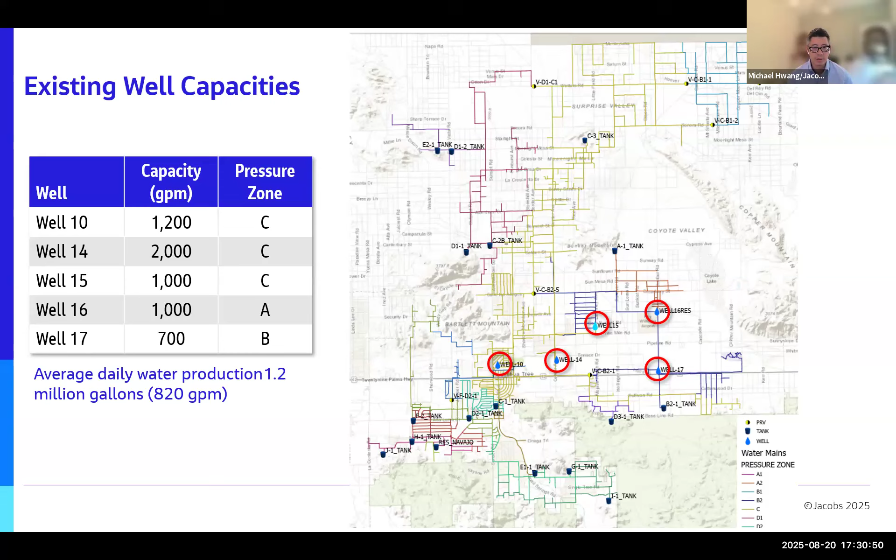One of the things Kathy mentioned earlier was that in formulating the alternatives, we were scoped as part of the study with Joshua Basin and the Water Alliance to look at decentralized or centralized treatment. So I'm just going to go over what that means.

We'll focus on decentralized treatment, which is that second column on the screen. For decentralized treatment, the treatment solution would be implemented at each of the individual well sites, all 5, and sized based on the individual wells the system is installed on. That would require each treatment system to be integrated with the existing well, disinfection, and tie-in facilities. In terms of overall system reliability and redundancy, it's really the same, because the treatment is at the 5 individual wells already in place that the district is able to turn on and off to meet demand.

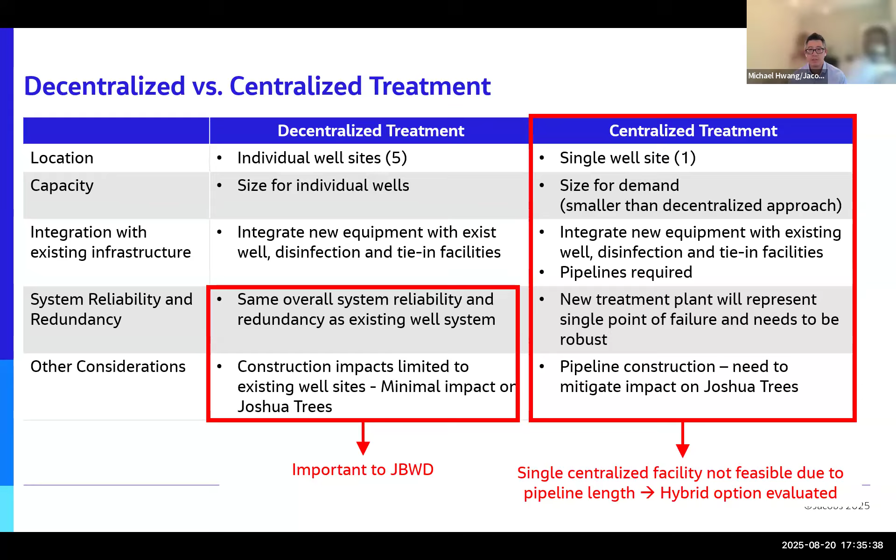When we were doing the initial screening for alternative formulation, the project team determined that a single centralized facility for all 5 wells would be very challenging and not feasible, just because of the length of pipelines that would be required. So what was carried forward was a hybrid option: a centralized facility, but not for all 5 wells, only 3 wells, with the 2 remaining wells having a decentralized treatment system at those locations.

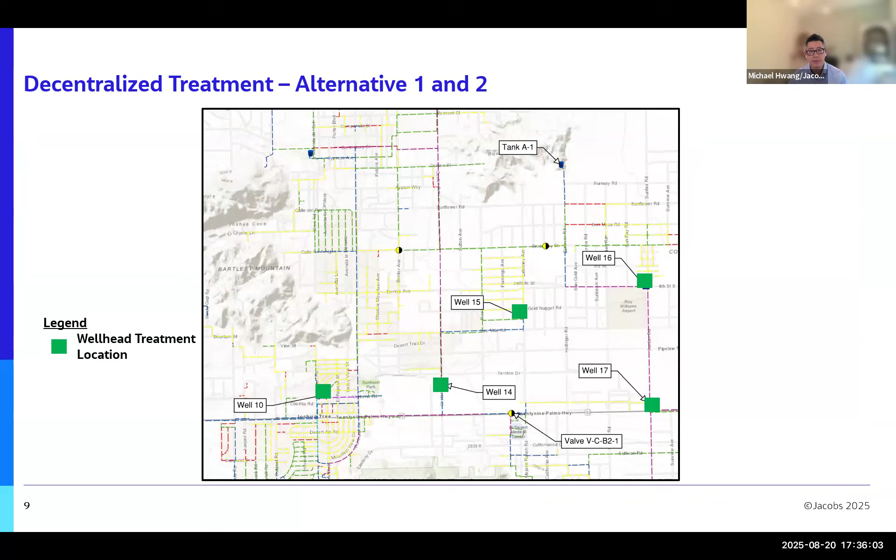So just to put what we just talked about graphically onto a map. The decentralized treatment option is shown here, zoomed in on the 5 wells. Basically at each of the 5 wells in green, you're seeing a new treatment facility.

The hybrid option is shown here, also a map. The light blue shows the centralized treatment location, basically a centralized spot at well 14 that would treat water from well 14, but also water from the 2 closest wells, well 10 and well 15.

The pipelines are shown in that maroon color, this is just preliminary routing that West Coast Civil came up with. The other 2 wells, which are further from well 14 - well 17 and well 16 - would have individual wellhead treatment sites, shown in green.

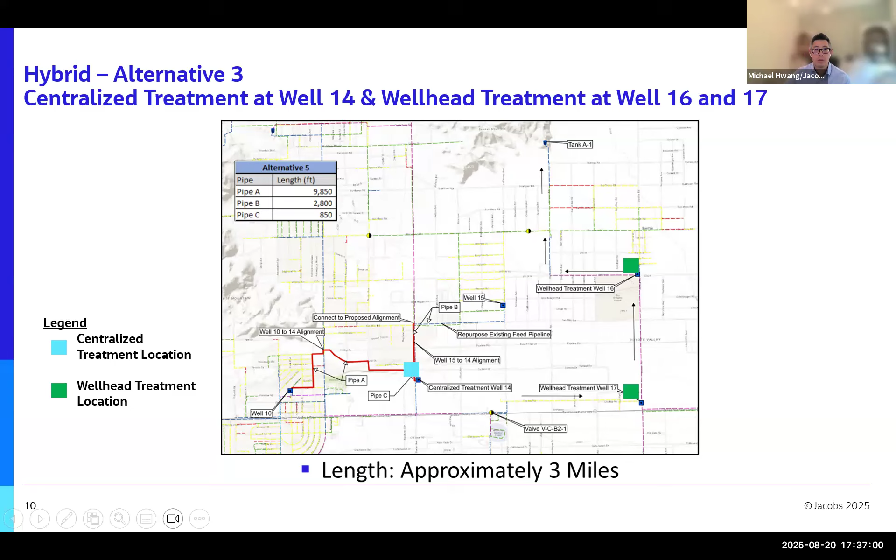So this alternative, we did evaluate it. It ultimately was not recommended, and the reasons are shown here: it was because of the overall reduced system reliability and redundancy.

Even though you still have 3 different sites, the collective consensus with district staff was that it would still be less overall system reliability and redundancy than if you had a treatment system at each of the 5 wells. The other main reason alternative 3 was not recommended was the concern with how pipeline construction was going to impact the Joshua trees.

So in the subsequent slides that I'll be reviewing, we're going to be focusing on the 2 alternatives that were developed around the decentralized treatment.

Any questions before I continue? Hearing none... no, I would, right.

Most of the wells are in areas of the community of Joshua Tree where Joshua trees aren't. I don't know how many Joshua trees would actually be affected by this. Is there an actual survey of all this done?

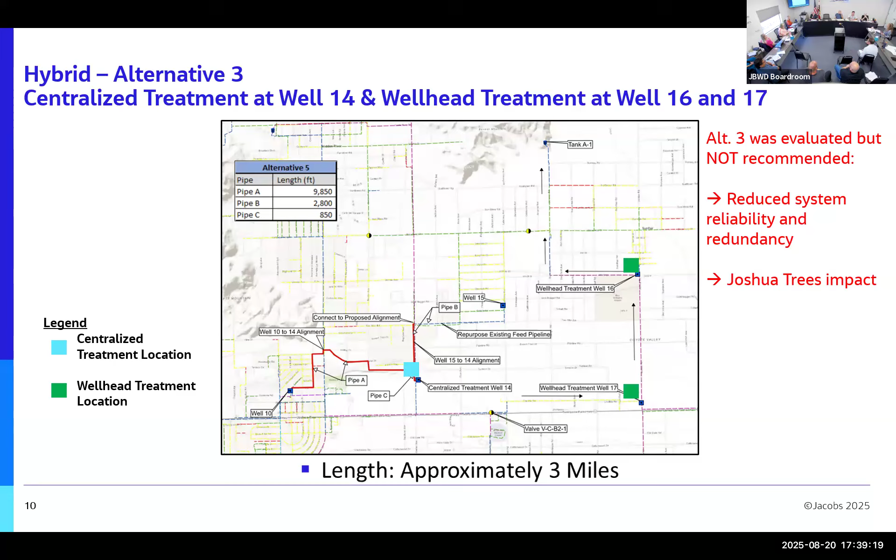Okay, so we talked about decentralized versus centralized treatment. Now I'm going to cover really briefly the treatment technologies.

Previously we listed 3 main technologies, shown here in bold: reverse osmosis, nanofiltration, the second one is reduction, coagulation, filtration (RCF), and the third was ion exchange. For ion exchange, there are several types that could be applied to treat chromium-6. As part of the initial screening...

Several of the technologies were looked at but screened out. The primary reason they were screened out, I'll go through each one, is because of the residuals generated from these treatment approaches that would have to be disposed of.

For reverse osmosis, it's a membrane treatment process. It is effective, but it does produce a brine concentrate waste that has to be managed. Typically that would be discharged to a sewer or to evaporation ponds, both of which are limiting. That technology also requires chemicals for membrane cleaning, which would have to be managed.

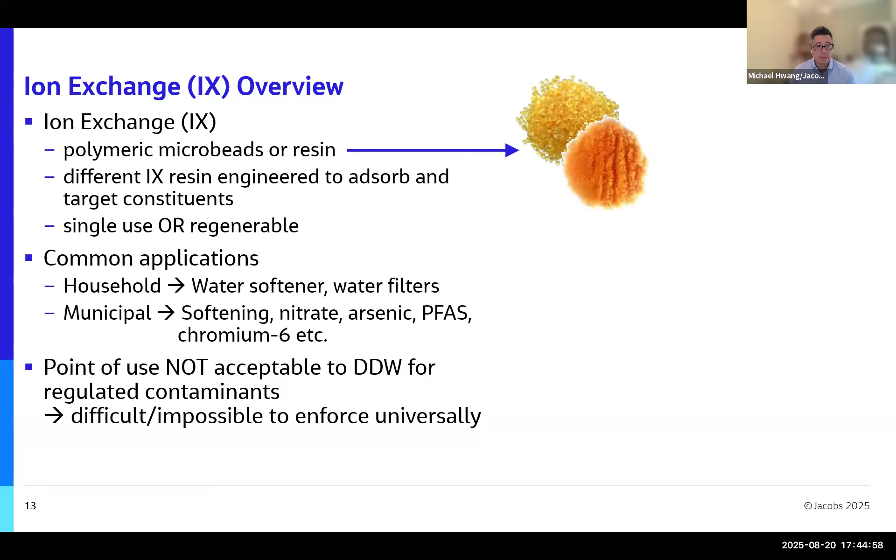So a little bit more detail on ion exchange. What is it? It's basically an engineered media made up of microbeads or resin. There's a picture of it, and it looks kind of like quinoa. There are different types of resin engineered to adsorb different types of constituents, and as I mentioned earlier, they can be single use or they can be regenerable.

Common applications that many of you may be familiar with are on a household basis. If you have a water softener yourself, what they typically put in those vessels next to someone's house is a type of ion exchange media. With a water softener, people usually have to buy some form of salt, either sodium chloride or potassium chloride, which you can pick up at Home Depot. That's what's used to batch up the regeneration solution.

On the municipal scale, the systems look a lot bigger. They can be used to remove different types of constituents. They can soften water, just like home water softeners, except on a larger scale. They can remove nitrate or arsenic, or if you've watched some films on Netflix, they can remove PFAS, what they call forever chemicals - that's shown in the picture on the right. They can also be used to remove chromium-6.

The last thing to note in terms of ion exchange and other treatment technologies is that point of use systems are not acceptable by the Division of Drinking Water. They really do want and require treatment systems to be put in place at a larger scale, because there isn't a way for the state to regulate households on an individual basis and enforce that requirement.

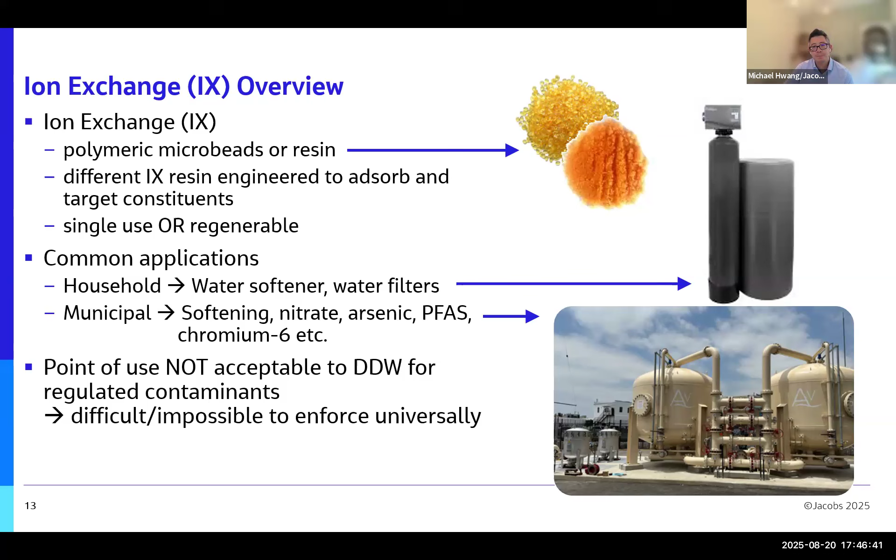So what would the treatment look like at each of the sites? The treatment system between the two alternatives is actually quite similar. The process equipment would include a pre-filter, so a cartridge filter or bag filter, just to take out any large particles from the individual well sites. Then you would have ion exchange pressure vessels arranged in a lead-lag configuration, meaning two vessels in series - one does the work, and the one in the back end is a polish bed, to make sure that when the first one is spent, what gets sent to the public is still clean.

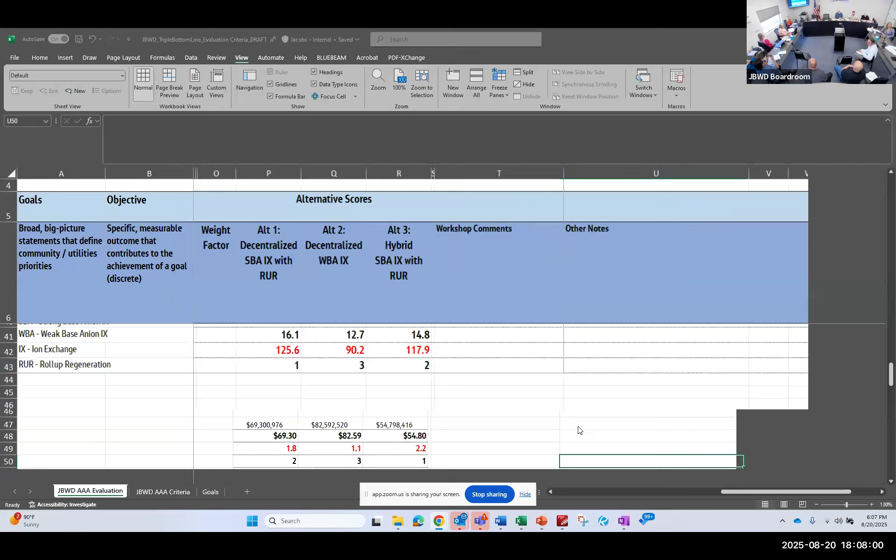And then in terms of cost, you can see the net present value cost listed here. I hope this is not too small. It is. Did you say it is? Yeah, it's a little small. I think the numbers don't quite match what we saw on the other slide. These might be the numbers before they were refined. This is the net present value cost. Keep in mind, it's not the capital cost, so it's all in for construction as well as operation and maintenance over a 20-year period. Yes, so this alternative does have the lowest net present value cost.

$54.8 million. Yes. Next slide.

Any comments or questions? This is for 10 years, isn't it? Didn't you say it's 20? They said 20, well you said 20 on the other graph, but I thought you said it was 10 years on this one. It's all based on 20 years. It is, okay. Yes.

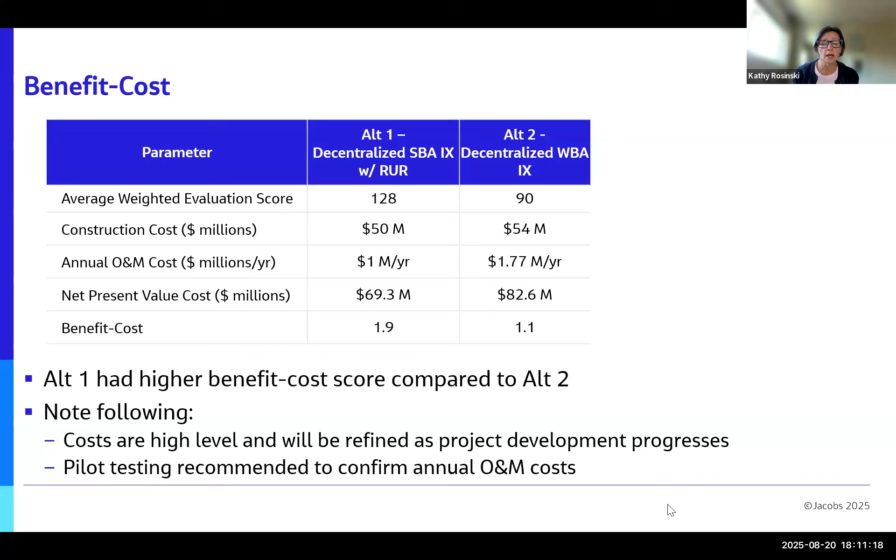We do have some closing remarks just kind of on next steps as you think about what to do about this, how to execute this.

So the next step really would be to just think about how to implement this project, to refine and optimize these alternatives. There is certainly a lot we could look at to start looking at more details and refinement that can give you better confidence in the cost.

Looking at project funding sources, so state revolving fund or WIFIA or other sources like that.

Think about project delivery method. That is important because the time frame for implementation of this project is fairly short, even though these are fairly, I would call, somewhat straightforward projects, just incorporation of those vessels. Still, a couple of years is not a lot of time to implement a project like that. So think about delivery methods that would be able to get this project in the ground for you.

Again, look at permitting, confirm what the permitting requirements and timelines are, and develop a comprehensive implementation schedule so that you can be sure you can meet those regulatory guidelines.

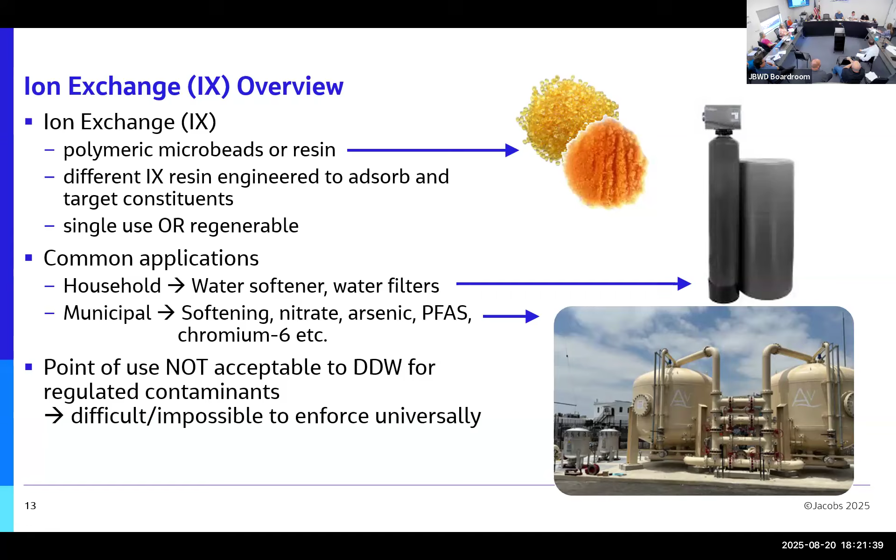I did want to mention, I believe some of the larger districts are already doing this, and there are systems already up in the state handling the mandate, like LA and San Francisco, that kind of thing.

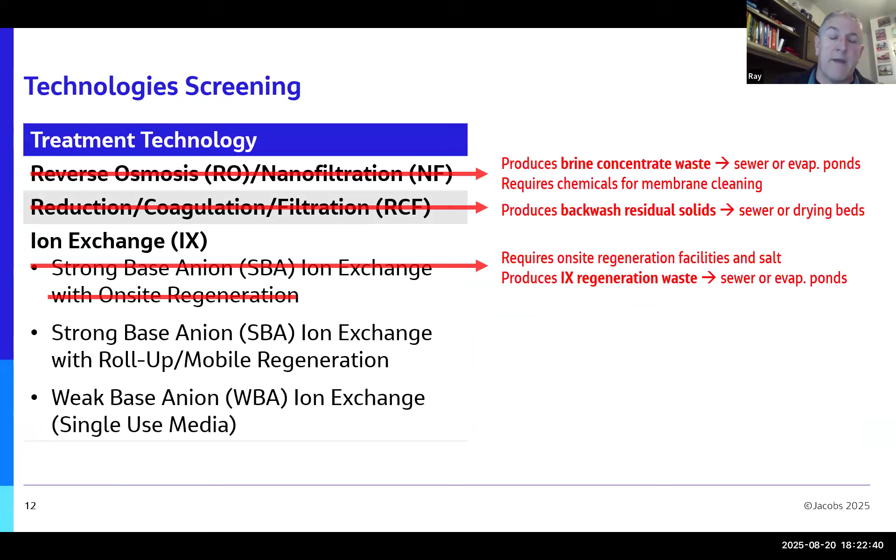So you might consider them pilots because they're functioning already, but does a pilot mean you might find out it's not working right, or is it just accumulating information? It's both, isn't it? It's a small scale version of the full size treatment system, meant to treat the resins and test the process you're looking to choose, and make sure it works with your water quality. There are sometimes differences in water quality that could impact treatment performance, which is why you do pilot studies before constructing full scale. That ensures it should work appropriately with your water quality. I believe the state now requires pilot studying before you choose a treatment option.

All right, thank you, Steve.

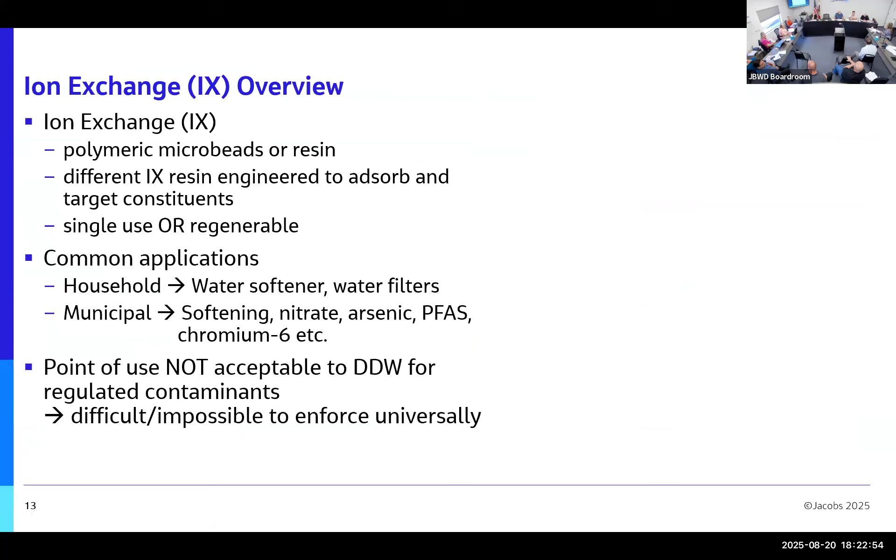There's a book out there, and Sarah has a copy of it now, where smart people say that when you're doing something new, dip your toe in first. Don't overcommit to it. A pilot study would represent a cautionary measure in an area we're unfamiliar with.

Is there the possibility of having to start over as a result? Not likely. Not likely. So you're doing all that now in the research and- not likely, but that's why not likely.

I think pilot study in this case would be valuable to confirm your operational parameters, not to determine whether it works or doesn't. So it's more of a refinement, honing in on which media type is best suited, and confirming how long the media will last and what the long-term O&M costs will be for either alternative, whether roll-up regeneration or hauling off media and bringing in new media. That's probably going to be the goals of these pilots.

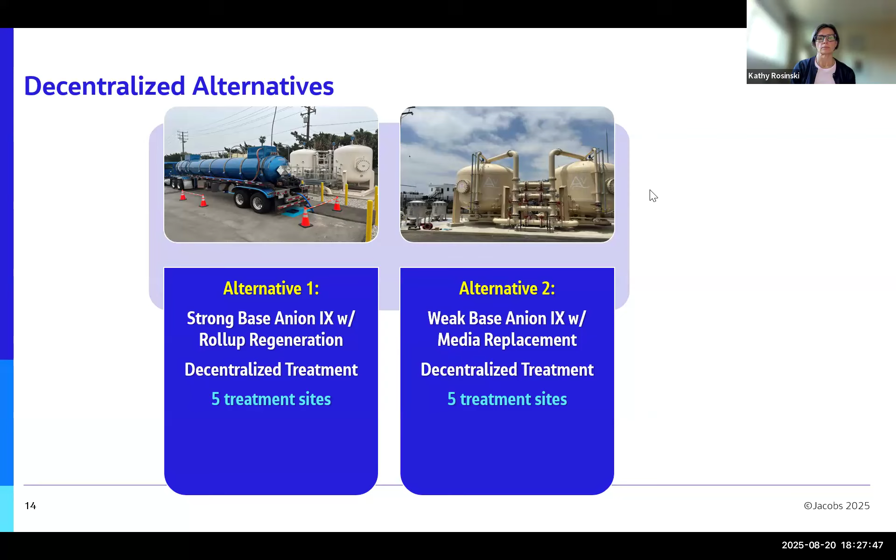There was a range that was listed in the slides, I think at the beginning, 25 to 35, yeah, top right there. For us, that's correct, but for other districts I haven't seen the ranges. Right, yeah, for us I know the range, but for outside districts, I don't.

Does this kind of imply that we need to get more customers? More development? Where are we gonna get the money from? If the operating costs are about $1 million a year, that's about $200 per service increase per month. That's doable, but we do have $750,000 for annual operating costs in the current rate study already, so we've covered some of that cost. Okay, that's good to know.

Well, I was pleased to see that this strong base is not requiring a lot of chemicals. On the bottom of page 13 of this staff report, it says SBA presents fewer safety risks for operators because it minimizes or eliminates the need for direct chemical handling, making it a safer and more straightforward option from an operations standpoint. But things happen, and there could be a leak of some sort of acid because we're fooling around with our pH or something.

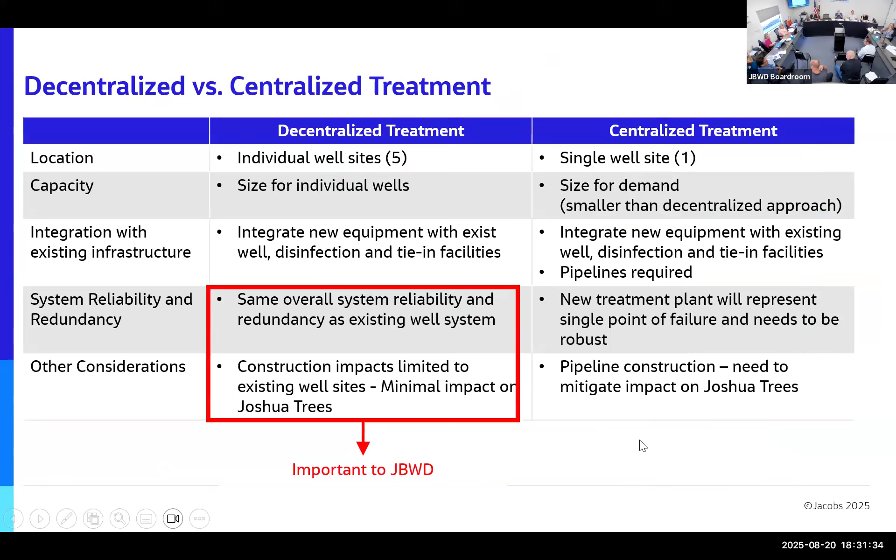I see on the screen it had like standalones. Is that the way it's gonna be here in the desert, or are we gonna have a building around it? All of those are still TBD. We asked those same questions. It seems that those facilities can withstand the heat and the direct sunlight, so we may consider a building, we may not. It just depends as we move further down this process. So that will also include the footprint in square feet, depending on what we're gonna need at that point, depending on the pilot program.

I do want to clarify that in our cost estimates and assumptions, in terms of implementation of this project, we did include a building around the vessels. That was driven by what we saw at existing sites, where clearly the impact of the elements, the sun on a daily basis, warrants a canopy or some sort of enclosure. So we did include a building for these vessels. Whether it's absolutely needed or not, we could certainly explore that and adjust, but that cost you saw includes an additional building at each site.

Can I continue? Yeah. In that building, were you using cinder block, or what kind of building were you putting around it, just so we know the material? I think it was based on a metal building, an insulated metal building, something similar to what we saw at your existing sites, of similar quality.

Thank you. Does this include solar?

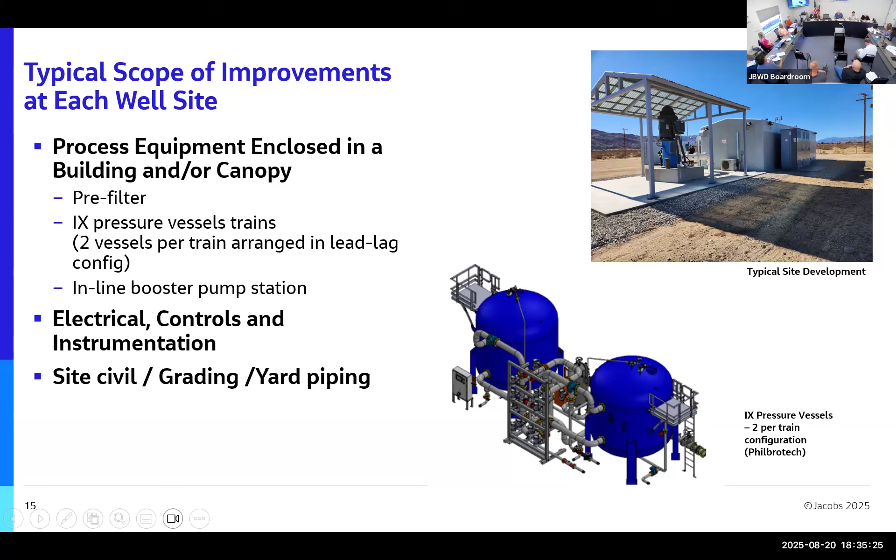Is there a motion from the board to receive and file the chromium-6 alternative analysis? I'll make the motion. Second, please. I'll second. General Manager Johnson, a roll call please. President Fluen, Aye. Director Fick, Aye. Director Jarlsberg, Yes. Director Short, Yes. Motion carried. Thank you, Kathy and Michael, appreciate your time. Thanks very much, appreciate the opportunity.

Funding resolution, this is item C. General Manager Johnson: This was pretty much introduced in the last topic. The next step we need to take is apply to SWRCB's FAAST application for funding. There may not be funding, but what they are trying to do is tally up what the costs are across the water districts in need of funding, so they can hopefully include that in their intended use plan. We would like to apply for it so we can get on the list, and we recognize that we need the funding. The payback can vary, and we'll bring that back to the board. We're not going to accept anything without the board reviewing the different opportunities they offer. It could potentially be some principal forgiveness, or a low interest state revolving fund loan. So there are a couple of different options. We started the FAAST application and didn't find it as straightforward as they promised it would be.

One of the key components is to have a board resolution authorizing us to begin this, so that's what I'm bringing to you tonight. If you have any questions, I'm happy to answer. Director Fick: No questions, go forward. Director Jarlsberg: Yep, I guess we gotta do it. Director Short: Yeah, seems like a no-brainer. Is there a motion to adopt resolution 25-1079 authorizing staff to seek funding assistance?